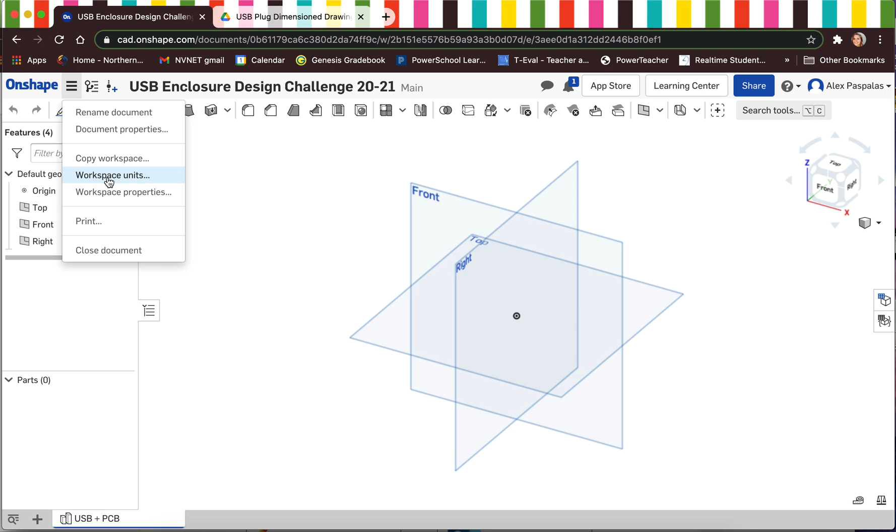So I had you all create a new document with your first and last name. And you were instructed to create a new part studio labeled USB and PCB. Before we start sketching anything, I just want you guys to make sure that your workspace units are in millimeters. Since this is something that's a lot smaller, we can't work in inches. We need to be a little bit more precise, so we're working in millimeters.

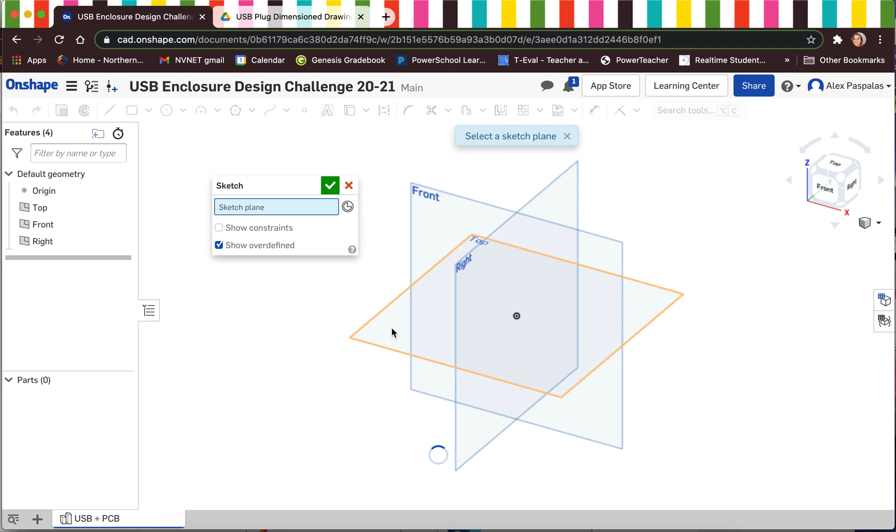What I also have open is the dimensioned engineering drawing, which I shared with you all. This is what I'm going to be using to actually show you guys how to model the plug on Onshape. So we're going to start off with a sketch on the top plane, and I am going to name this sketch plug. We need to get into the habit of naming everything. We started this a little bit, but we're going to really focus on that during this project.

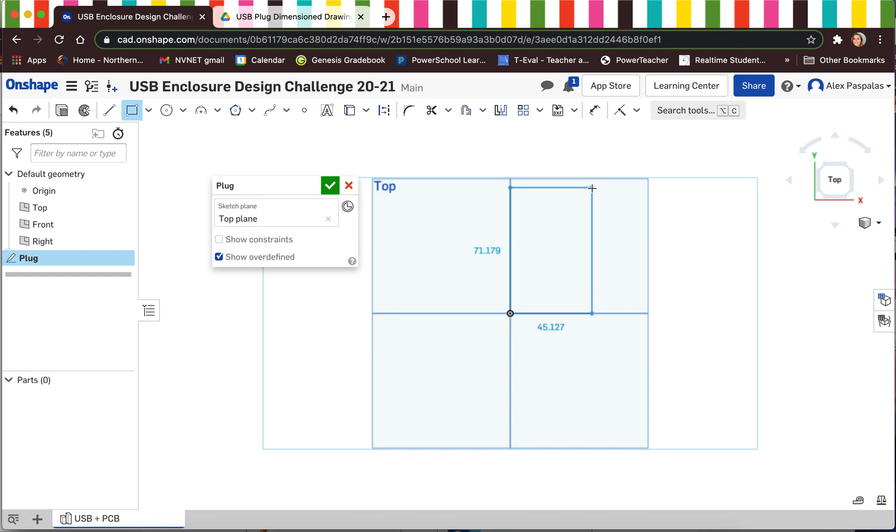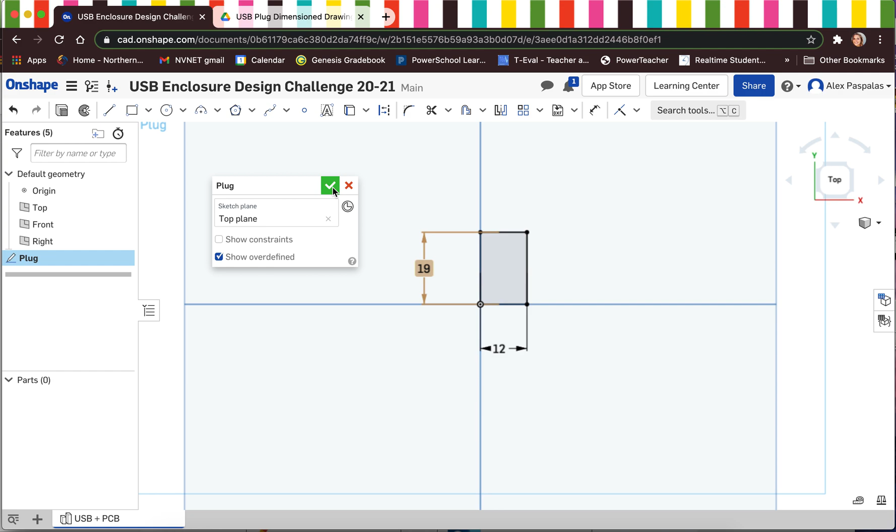So I'm going to choose the corner rectangle tool and start at the origin and create a rectangle that is, let me go to my dimension document, 12 millimeters by 19 millimeters. So I'm going to type 12 by 19. Perfect. So that's the overall length and width of our USB plug. So that's all we really need to start off with right now.

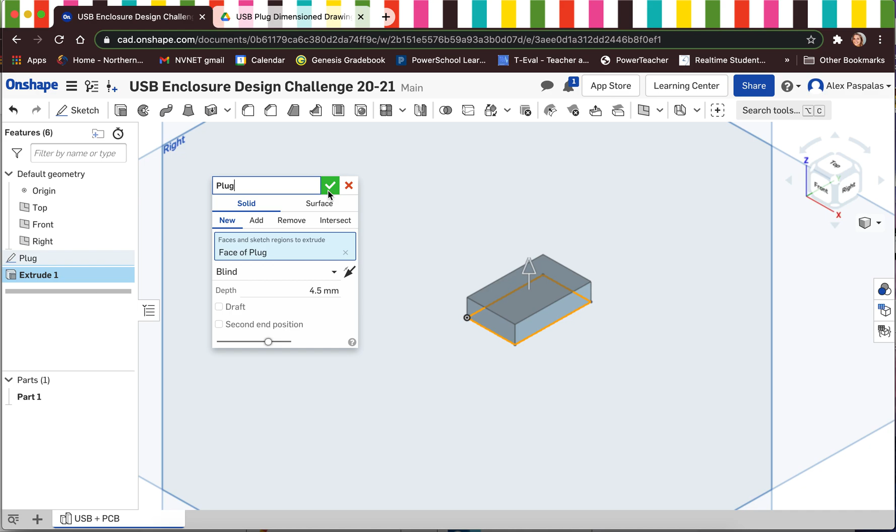I'm going to go into isometric view, and I'm going to select my rectangle, and I'm going to extrude that rectangle up 4.5 millimeters using this dimension right here from the right side view. So it's going to be 4.5 millimeters. I'm going to rename this plug and hit the green check. Okay, so now we have the basic layout for our plug.

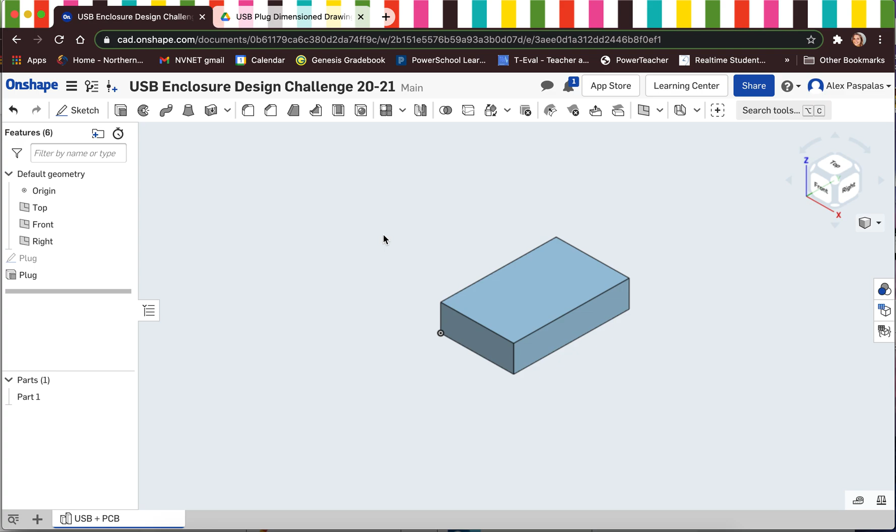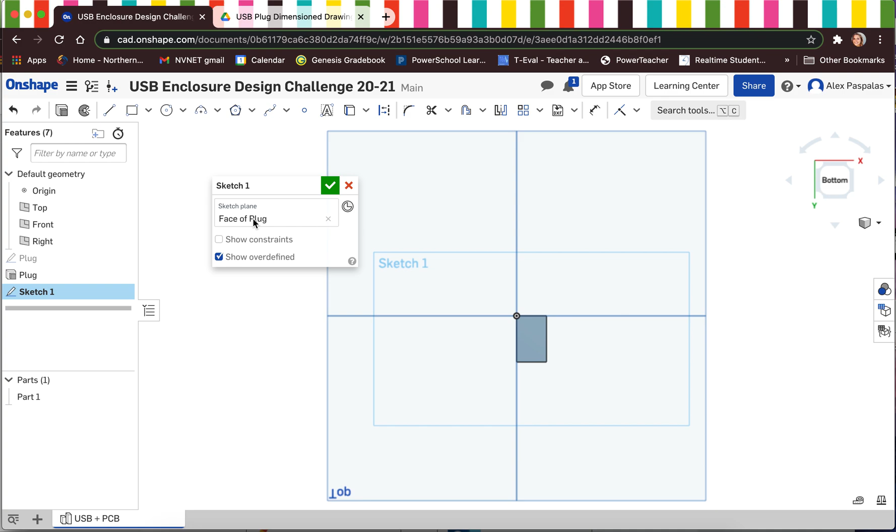If we take a look at the right side view, you'll notice that there's a little notch taken out of the back of the plug. Eventually we will create the PCB or printed circuit board coming out of that notch. But right now, like we said before, we are just creating the plug itself. So I need to come back to my part, and I am going to create a new sketch, and it's actually going to be on the very bottom of the USB plug. So I'm going to look at it from the bottom. It should say face of plug, and I am just going to label this plug cutout.

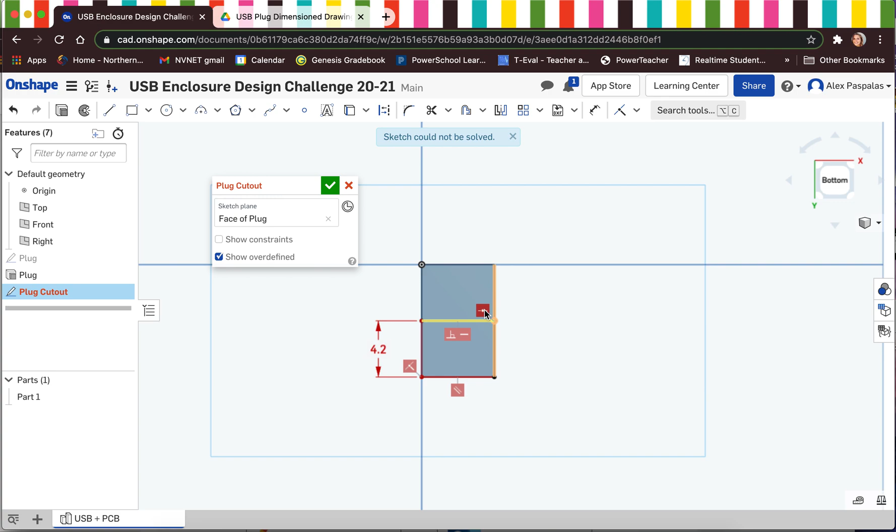And I'm going to start with a corner rectangle, and I'm going to draw that corner rectangle extending to the very outsides of the plug. So it's going to have a width of 12 and then a length of 4.2 millimeters. Now, if it turns red, like it just turned red for me, that means that there is a constraint on there. So I actually accidentally locked this into the midpoint of this line. So I'm just going to click this midpoint constraint and delete it, and we should be perfectly fine at this point.

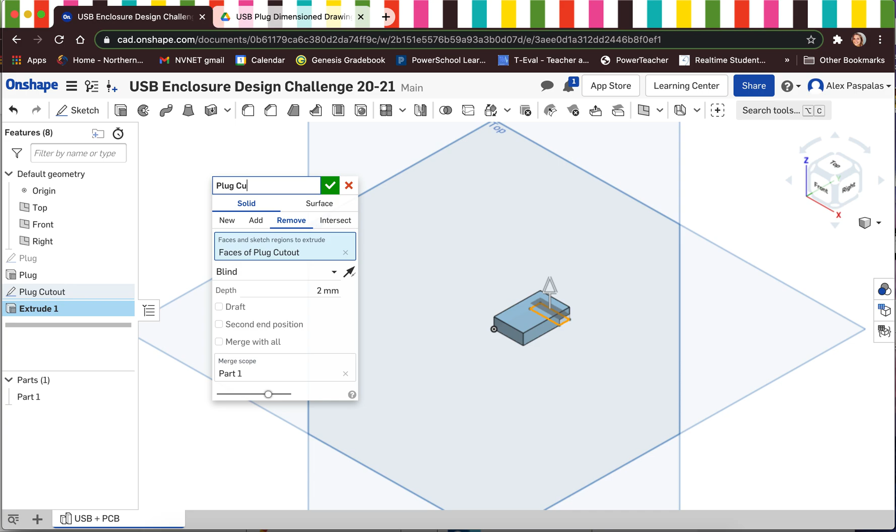So I'm going to go to isometric view, and now I'm going to hit my extrude tool. I'm actually going to hit remove, and I'm going to remove a portion of that cutout. Now, the portion that needs to be left is 2.5 millimeters, and my entire plug thickness is 4.5 millimeters. Well, just doing a quick little mental math, I need to extrude remove it up 2 millimeters. And I'm going to rename this plug cutout as well, just staying organized. Awesome. So now we have the overall profile of our plug.

Before we move any farther, let's also just rename this part. We'll name it USB plug. Okay. The next thing we have to do is use the shell tool to remove the inside of our USB plug. So if you're looking at your actual USB, it's just thin metal going all the way around. So we can use the shell tool to accomplish that.

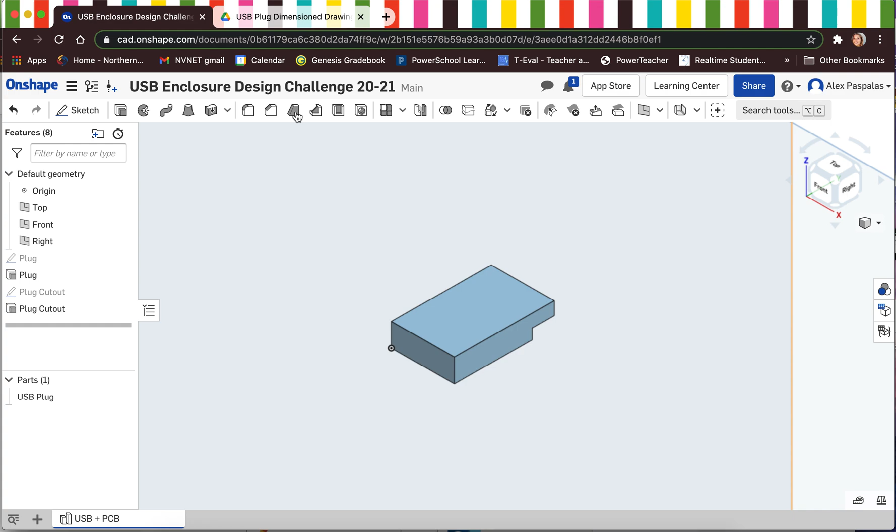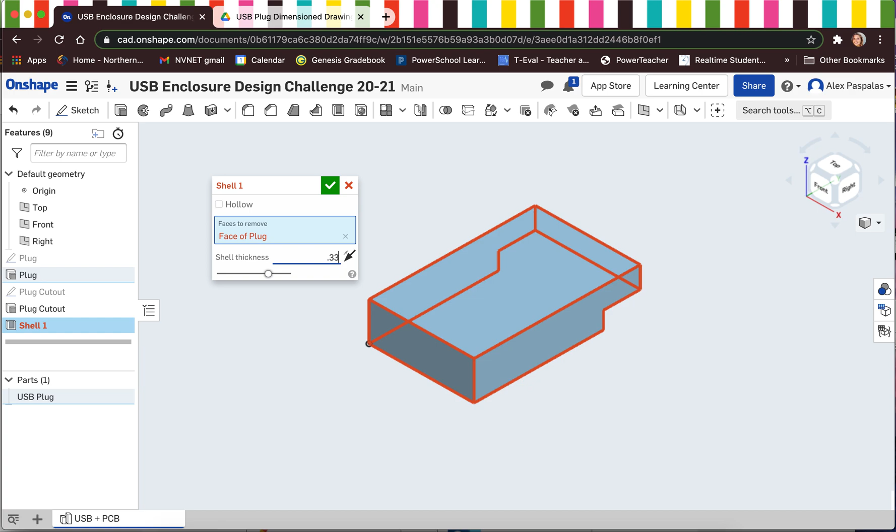Everything should be perfect. And you'll see that we removed kind of the inside of our USB. We didn't remove the back of the USB plug. We just shelled it. So it's kind of hollow on the inside. And you could just keep that as shell 1.

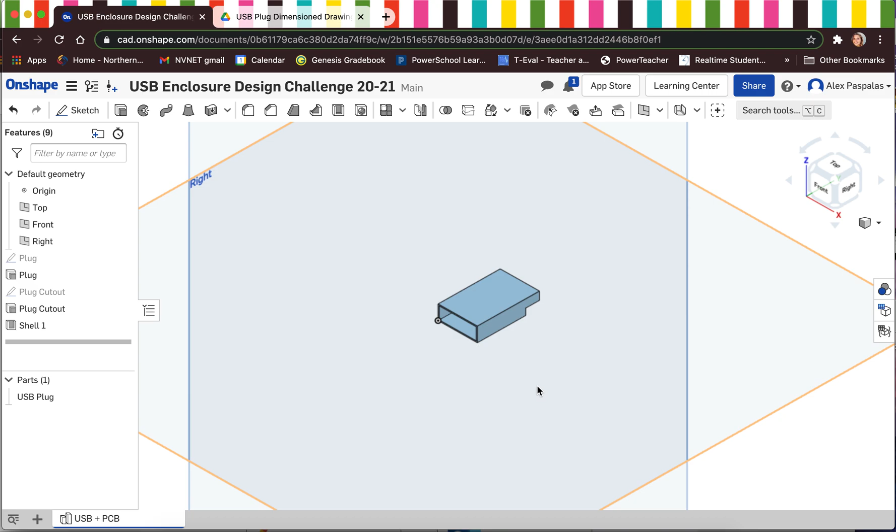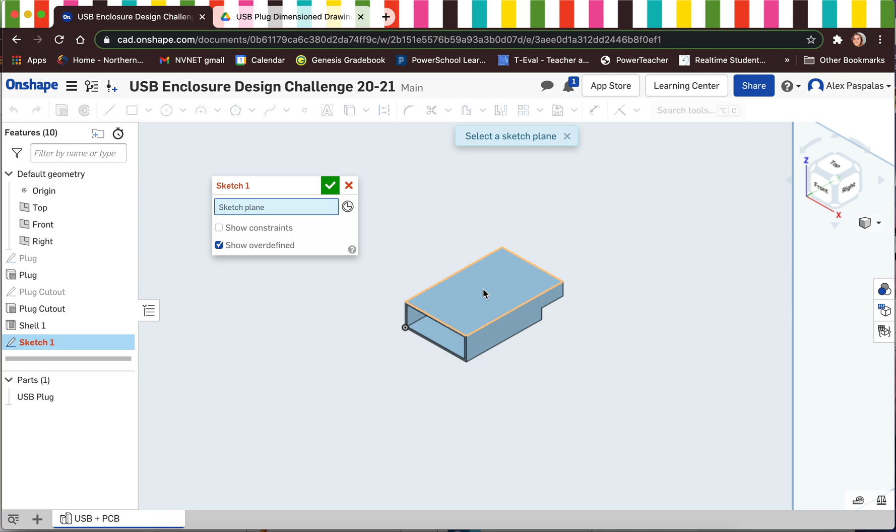I'm going to name this sketch Square Holes. And I'm going to start with a corner rectangle. And that rectangle has dimensions that is 2.5 millimeters long by 2 millimeters wide. So I'm going to type 2.5 and 2. Perfect. Now we got to put that in the right position. So it looks like it's 5 millimeters from the front of our plug. So I'm going to type 5.

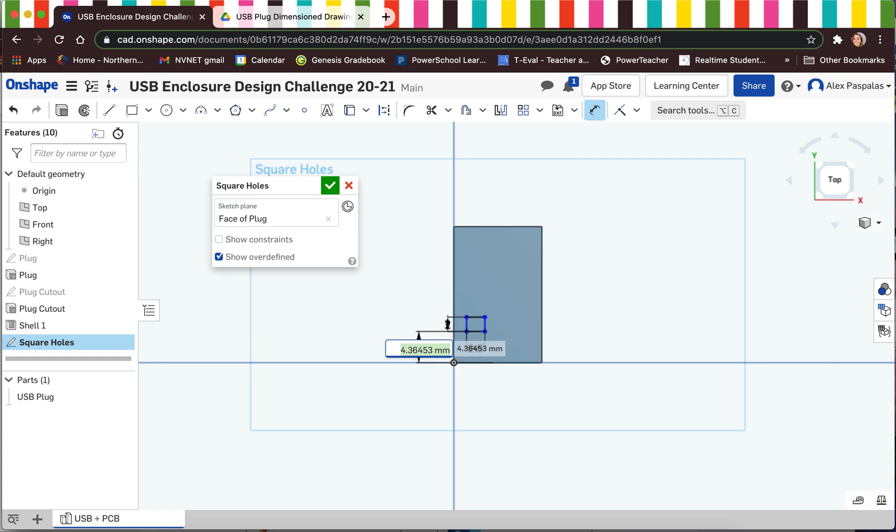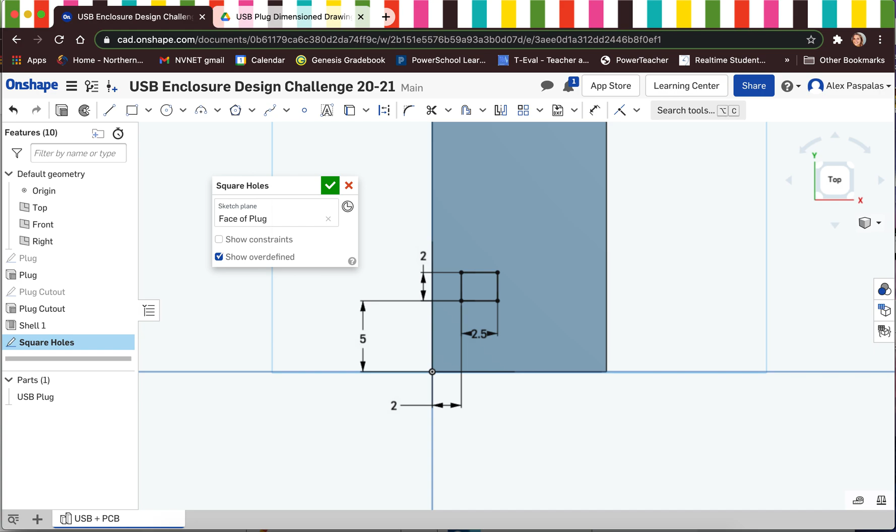And it looks like it's 2 millimeters from the side of our plug. So I'm going to use my dimension tool again. And that should be 2. Awesome. So now we have that perfectly in position, and both squares are equal to each other. They're equal distance from the sides of the plug. They're equal in length and width.

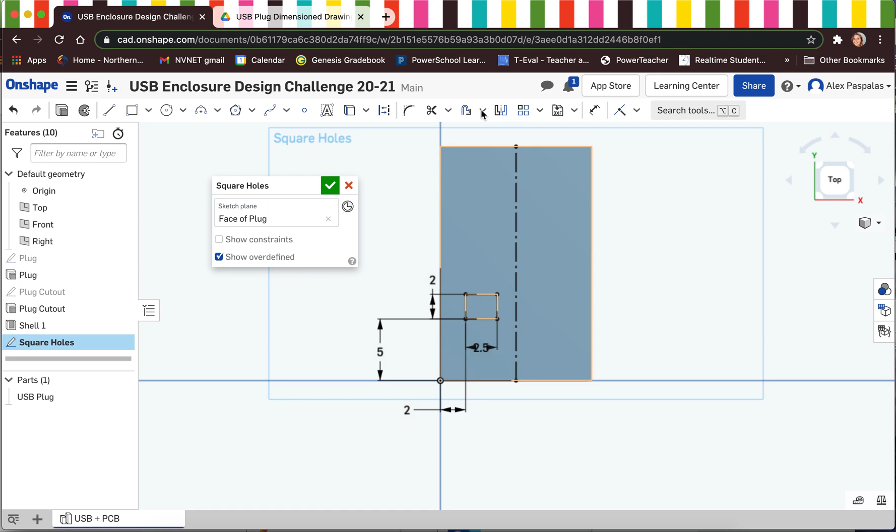So we can take a little shortcut and make a construction line. We want that construction line to be in the middle of the plug. So hover over this back line here until you get this square box, meaning that's the midpoint of the line. You're going to click down and just go all the way down vertically. Now we have a nice construction line that we can use to mirror our square. Now we don't need to add dimensions to that because we mirrored it and we know that they're equal and perfect and good to go.

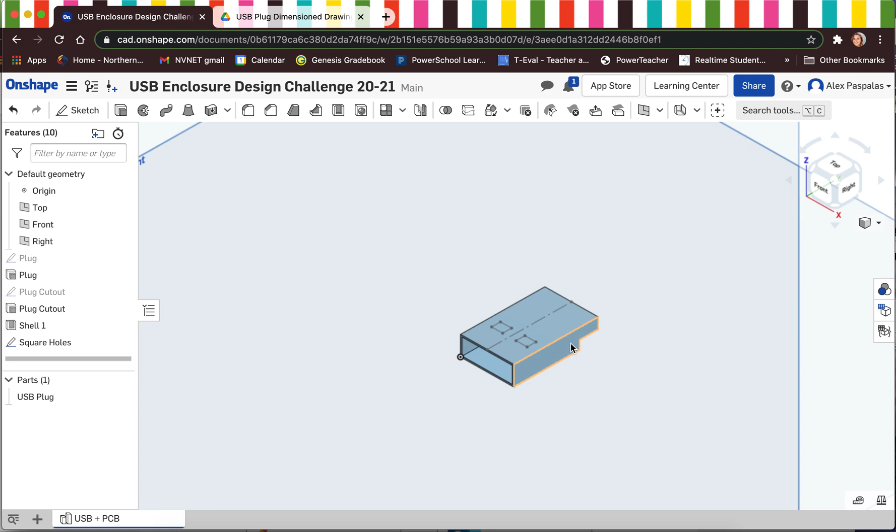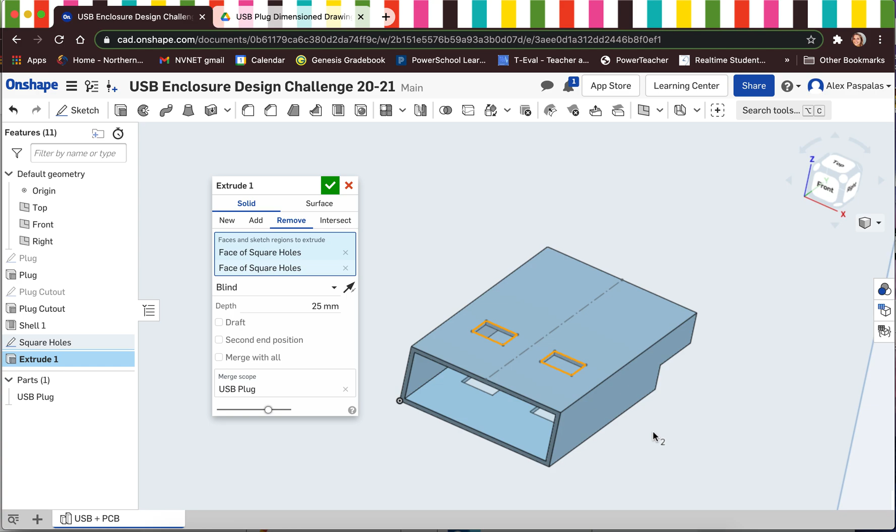I'm going to hit the green check and go to isometric view. Now we just have our squares sketch on the top, but we'll be able to also extrude remove those down to the bottom. So I'm going to select both squares. I'm going to hit extrude and I'm going to remove. And you can just leave it as 25 millimeters. It doesn't really matter what we put in for the depth as long as it goes all the way down and projects to the bottom of our USB plug. So I'm going to rename this Square Holes just so everything's nice and labeled, and hit the green check.

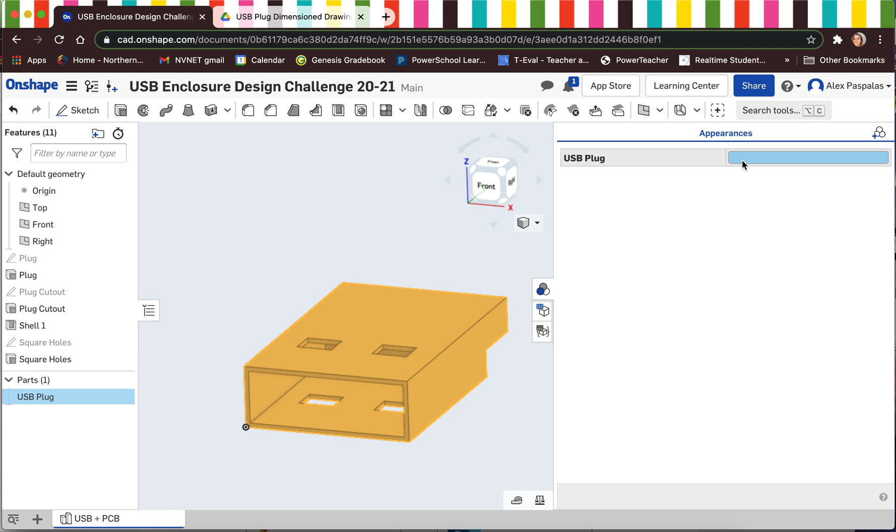And now that's perfect. Before we move on, I do just want to change the color of this part just so it nicely represents what our part looks like in real life. So I'm just going to change it to a gray silver and hit the green check.

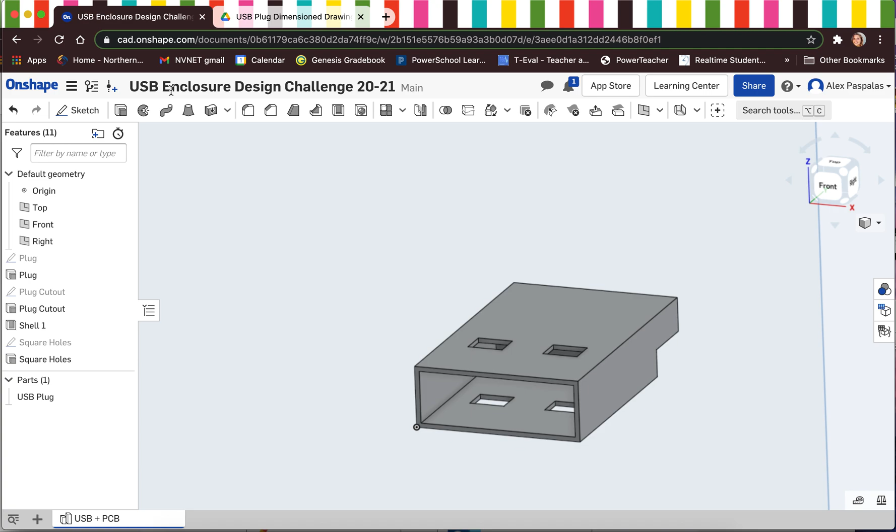And that looks great. Now the last part, if we're taking a look at our engineering drawing that we need to create, is what I'm calling the inside plug. It's that little black rectangular piece that sits at the very bottom of the USB plug. And we see some dimensions for it on the right side and also some dimensions for it on the front. So I'm going to walk you guys through how to do this. This is probably the trickiest part of creating the plug.

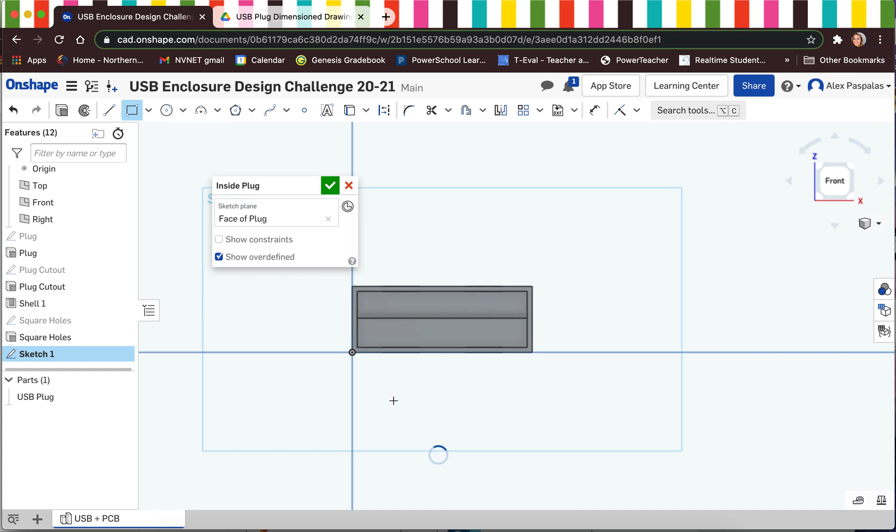So I'm going to make a new sketch, and the sketch plane I'm going to choose is the very outside face of the front of our plug. So you want to make sure when you do this that it highlights just the outside face. I'm going to rename this sketch inside plug, and I'm going to start off with a corner rectangle, and I'm just going to start that corner rectangle at the very outside corner of the USB plug and extend it out. Now, this is automatically 1.405 millimeters just based on how I drew it, and we made both sides coincident with the outside edges of the USB plug. So I'm just going to hit escape.

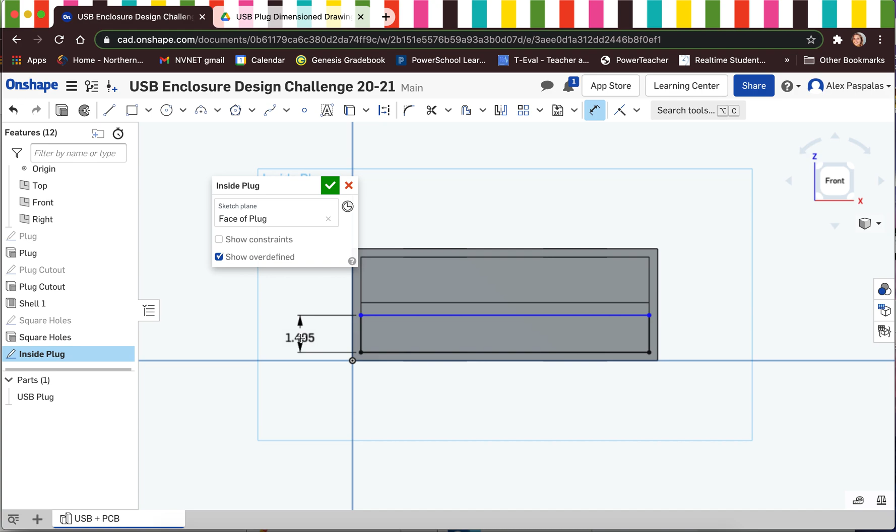I'm going to go back to my engineering drawing, and it looks like that inside piece of the plug has a thickness of 1.5 millimeters. So I'm just going to grab my dimension tool and change this to 1.5. I was pretty close. And I'm going to look at it from isometric view and just zoom in. So that's great. Now, I'm going to hit extrude right from here. I want to change the direction, and I need to change the depth.

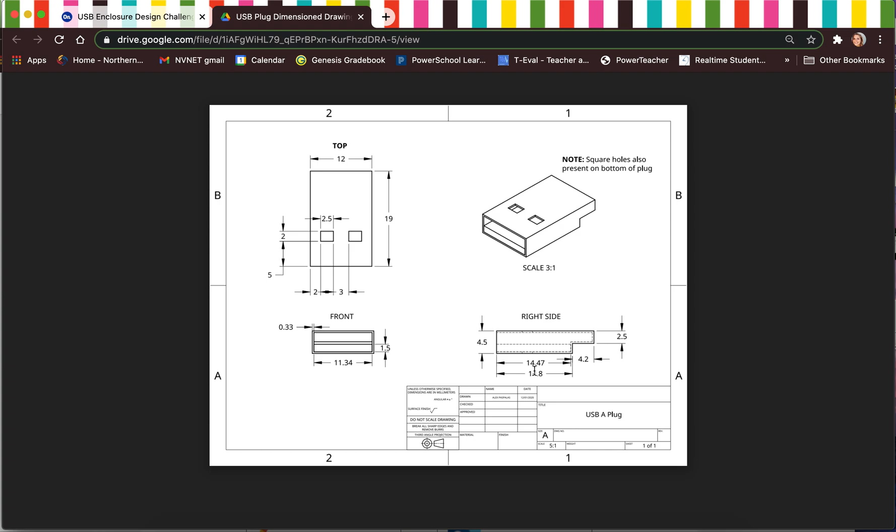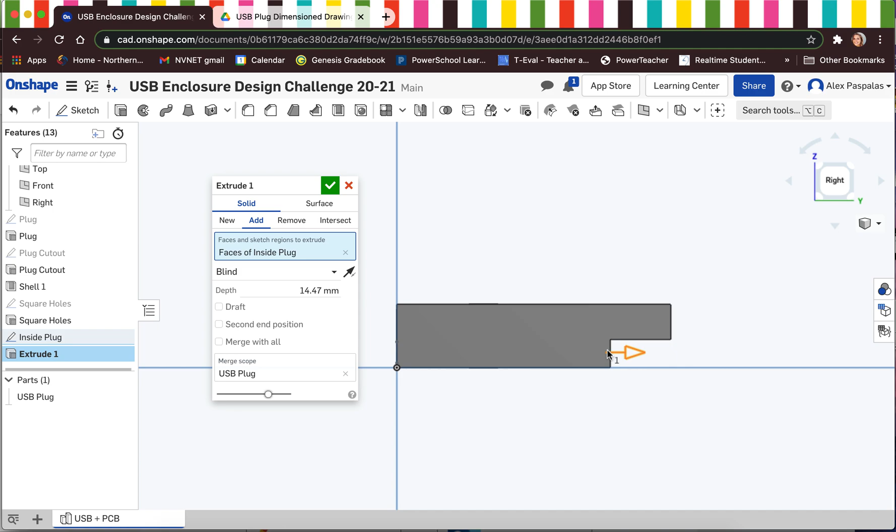And if we look at the right side view of our engineering drawing here, you'll see some hidden lines. Those hidden lines on the inside of our plug represent that inside black piece that's in our plug. And it looks like that has a depth of 14.47 millimeters. So I'm going to change this to 14.47. Okay, and if I look at it from the right, it's not going to extend all the way to the very end of the plug because remember, there is that wall there. We want it just to butt up with the wall.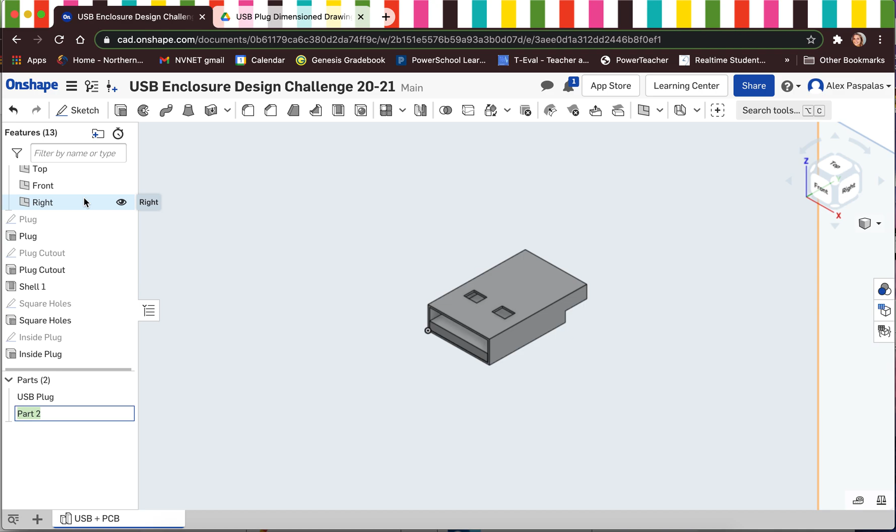Now, it still only is telling me that I have one part here. I need to create a new part. So we should have a part 2 come up, and I'm going to rename this extrude inside plug. Hit the green check, rename part 2, inside plug. I want to click away. There we go. Click on inside plug. Change the appearance. Let's make it black. Green check.

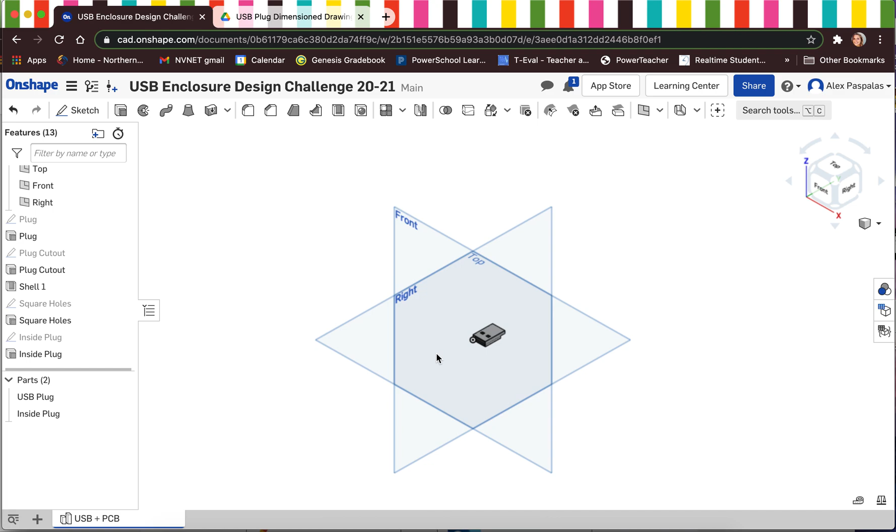And there we go. We have our universal USB plug. It's the same for everyone. And hopefully our USB enclosures will all fit around it.